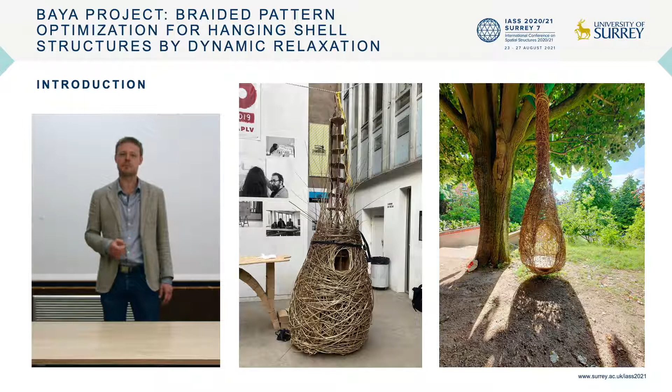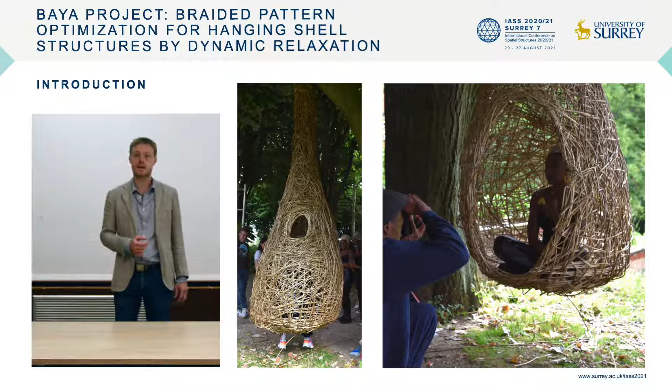Good morning, everybody. We are glad and proud to present you work of research and pedagogy on the specific typology of suspended braided structural shells. This work has been performed for a full-scale public pavilion called Baya, in collaboration with the Paris City Hall and the 19th District City Hall, by the students and teachers of the School of Architecture of Paris-La Villette and of Engineering of Centrale-Supélec of Paris.

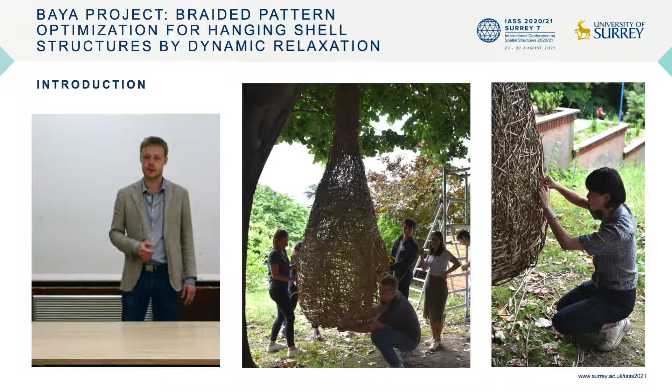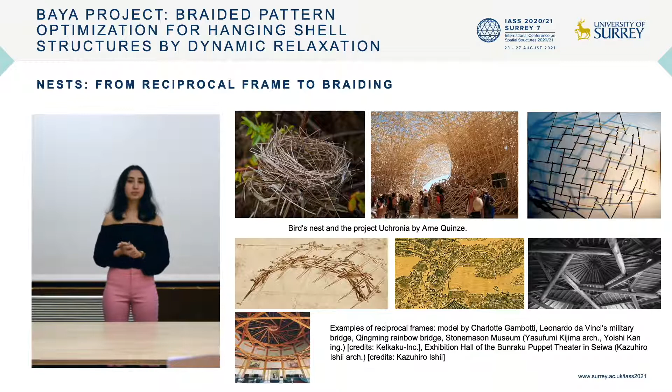When you think about how a bird's nest works, reciprocal frame is the first idea that comes to mind. The structural typology forms a surface composed of inclined beams supporting each other. The end of each beam rests on the next beam that supports it, forming a circularly closed assembly since the last beam is finally placed on the first one, each element mobilizing by bending the many other elements that intersect it.

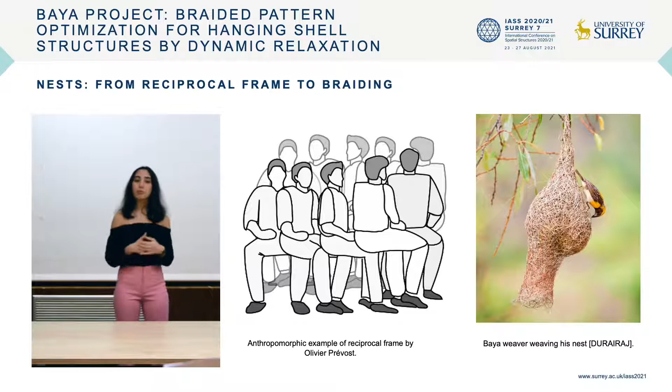However, it leads us to a new structural typology, part of this larger group of reciprocal structures: braided objects, on which the art of basketry is based. There are many different braiding techniques. The ones we have used are crocane and layered. This analysis resulted in the selection of three materials for the project: buff wicker, split wicker, and rattan blades.

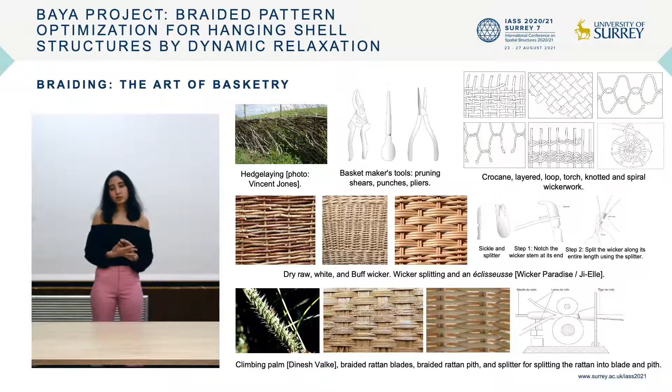Wicker is obtained from willow stems, which can reach up to 3 meters, harvested in winter. There are 4 types of wicker. Wicker is dry raw when it is dried naturally by keeping the bundles upright. After drying, the bark can be removed from the stems, and the wicker is then dried again. It will be left in water for 8 to 15 days before weaving in order to soften it.

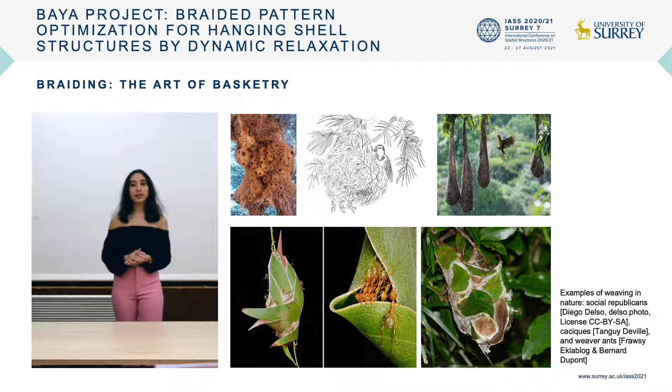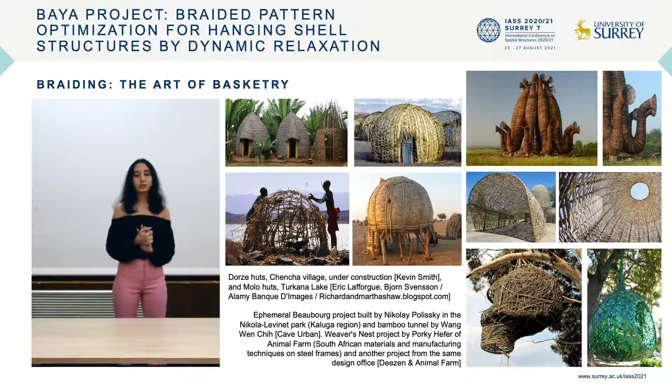It is interesting to note that basketry examples can be found in nature, as for social republicans, caciques, or even weaver ants. Basketry applications can also be found in primitive or vernacular habitat, and some examples are also to be mentioned in modern architecture. However, all of them, with few exceptions, have in common that braiding is only used as a filling element. It is not structural. Our goal is to transpose the basket maker's skill to an architectural work.

Our project, Baya, is a suspended pavilion, but our thinking is broader. It must be applicable to any loaded surface, such as shells, as well as simpler elements like beams. Our purpose is to study the constraint fields in the shell and to question the existence of an optimal braiding of the shell in relation with them.

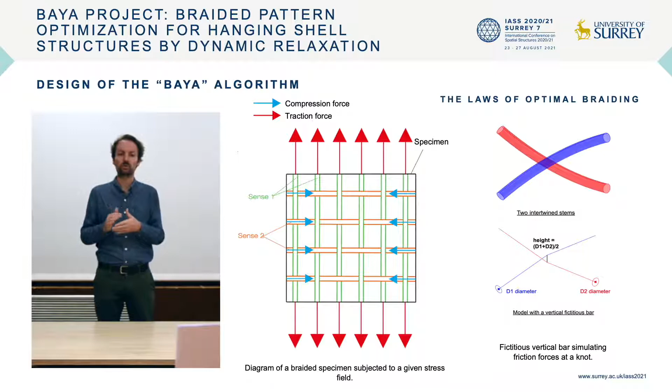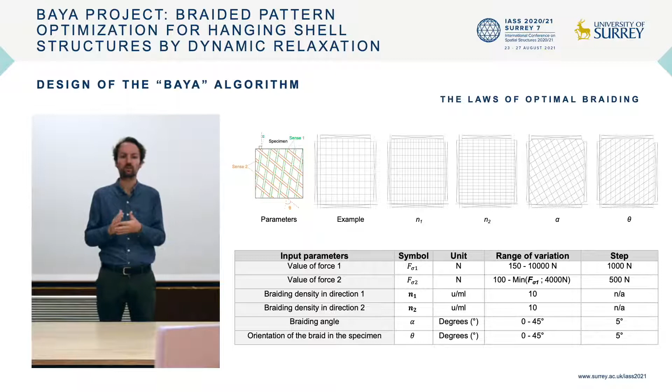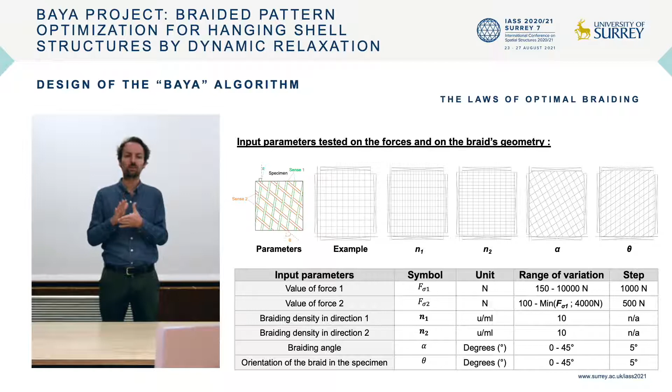Our numerical simulation is conducted by dynamic relaxation, a method that allows us to solve static equilibrium problems by fictitious dynamic calculation. The braid is a set of strands braided in 2 different directions. In each direction, the strands are parallel to each other and pass alternately above and below the strands of the other direction. The specimen is subjected to forces that simulate the principal stress field in the shell.

The study of the specimen teaches us the following principles: as expected, the yield ratio is a linear function of the tension. Local buckling is not an issue with regular densities. Global buckling depends mainly on compression. Friction forces rise with tension and fall with compression, which explains why instability failure appears with lower compression when tension is not high enough. High values of compression lead to knots, translation or rotation, even decompression.

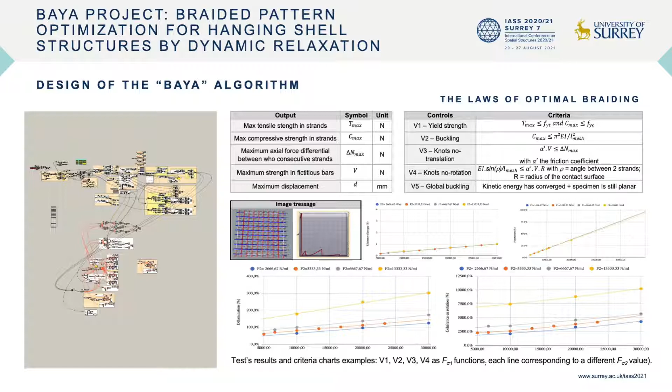Changing the braiding angle has little effect if input forces are almost parallel to the strands, with alpha close to 0, which validates the idea of braiding along the principal traces. As the results couldn't be compared with the bibliography, since we did not find any equivalent studies, it was necessary to verify them by a similar experimental study.

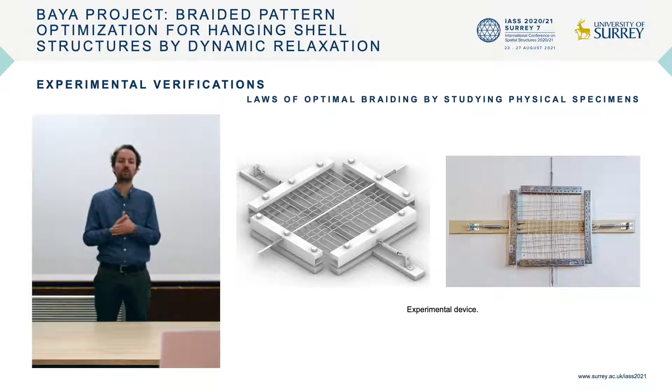The algorithm determines the principal stresses for any shell under a given load. Thanks to the optimal braiding laws, it gives the ideal braiding for the shell. The algorithm can be applied to any loaded surface, including basketry items, and we chose to illustrate its presentation on an isostatic beam on two supports loaded by a uniformly distributed force.

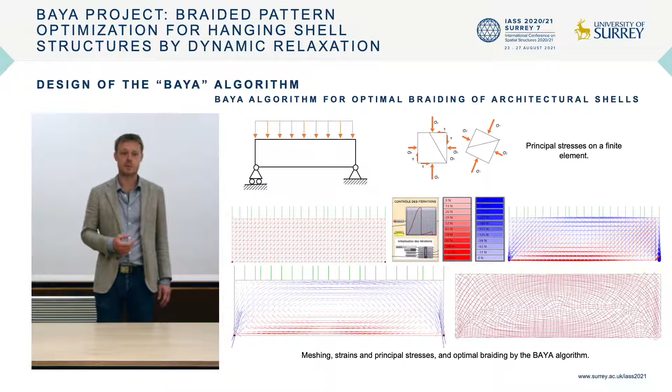The shell geometry and loading are the input. The surface is discretized into small rectangular isosceles triangles, each representing a finite element. We calculate efforts on the finite element edges by dynamic relaxation, and deduce from it the principal stresses in the finite element.

By using the laws defined previously, we eventually obtain the optimal braiding of the shell. After the study, we decided to braid the result in order to compare our Baya beam to a Pratt truss. For identical sizes, loads and safety factors, Baya needs half the quantity of Pratt.

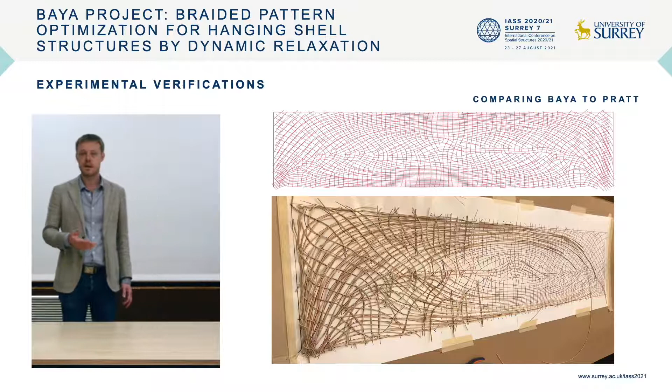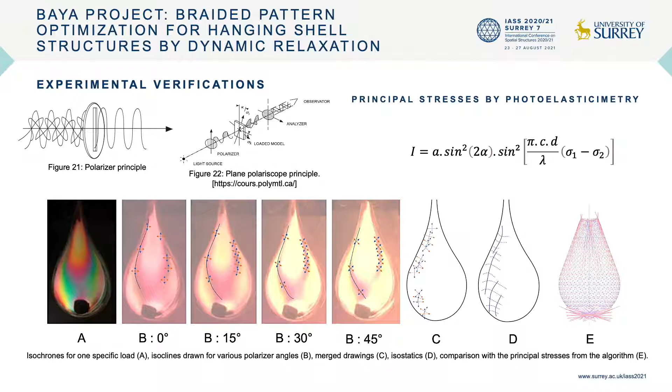We also performed an experiment called photoelasticity. We compared the principal stress fields obtained from the Baya algorithm to the isostatics of a shell made out of a birefringent material.

We tested another method to check the efforts obtained in the edges of the finite element by the Baya algorithm. We filled a suspended balloon with water, because the pretension it induces gives the capacity of compression to the balloon's skin. We loaded it with a mass. A picture analysis algorithm recognizes marker points on the balloon and converts the grid deformation into strength thanks to Hooke's law. The results are very similar to the numerical prediction.

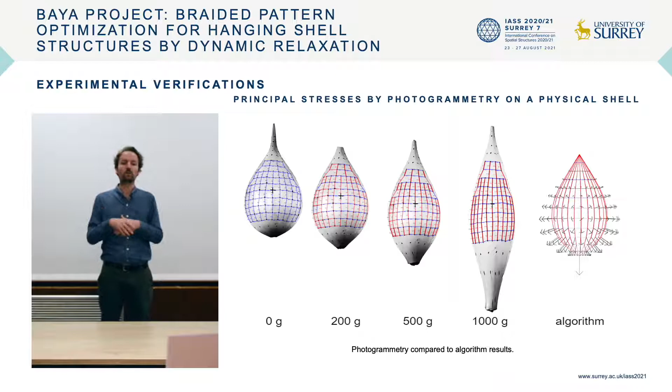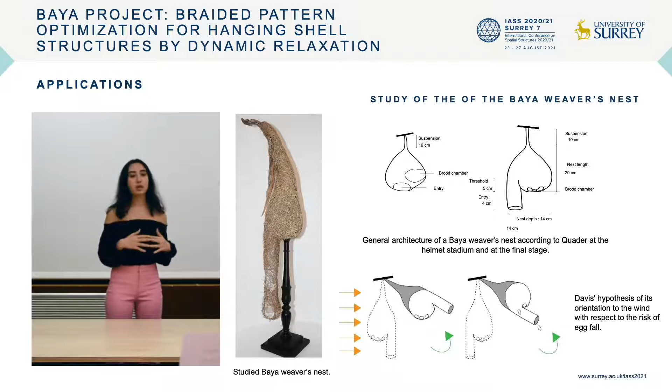The Baya project, described below, is a colony of suspended pavilions whose skin, the very structure of the object, is a braid of long and fine elements. Among them, it appeared to us that the nest of the Baya weaver was an object particularly close to our attention. The Baya weaver is a small bird which lives in Southeast Asia and builds suspended nests.

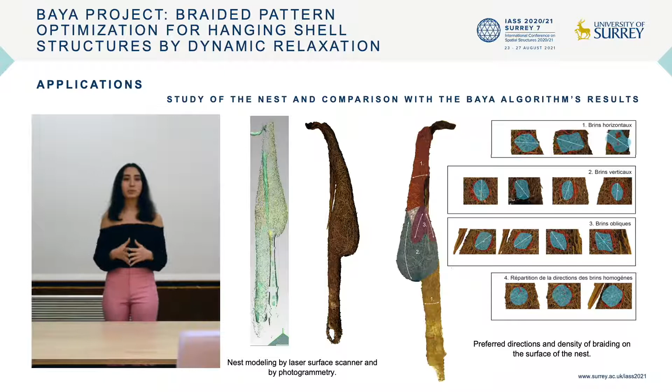The objective of this part of the study is to answer the following question: does the Baya weaver, when it makes its nests, follow the laws of optimal weaving that we have defined? To answer this, we first carried out a survey by laser surface scanner and by photogrammetry of the nest, supported by the MAP-MAC laboratory and the National Museum of Natural History.

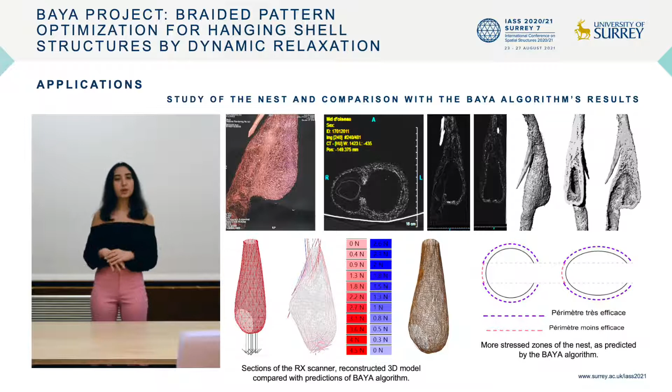The results seem to betray the ghost of the temporary scaffolding used by the Baya weaver to build its nests. To confirm this, we scanned the nest with X-rays thanks to the help of Dr. Bandeau, gaining access to the interior of the nest walls.

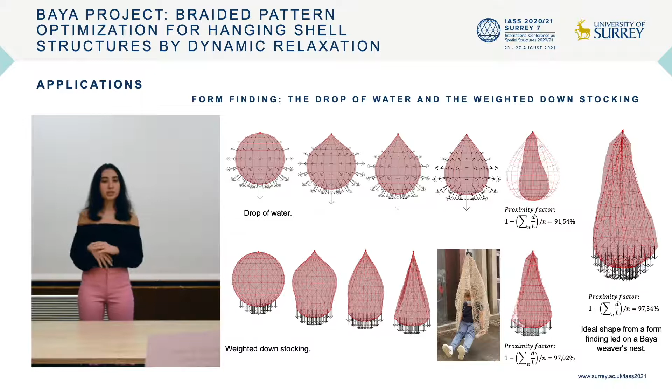Several authors compare the Baya weaver's nest to the shape of a drop of water at the time of its detachment. Others, like Newton, prefer the comparison with a suspended and weighted-down stocking. Thus, we carried out a comparative form-finding study, looking for the shape minimizing the energy involved in the two systems using the Baya algorithm. The proximity of both shapes to the nest rules in favor of Newton.

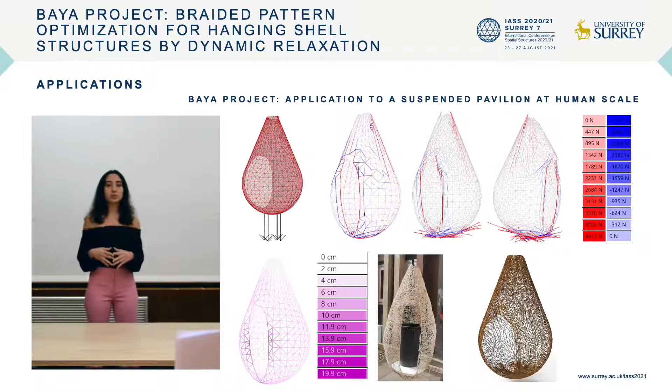Before braiding the final pavilion, we decided to build a half-scale prototype. The deformation of the prototype was critical, but fitted the algorithm's prediction. The observation of the loaded surface guided us to reinforce the density of the compressed area in order to avoid surface buckling. The park of the Butte du Chapeau Rouge is in the 19th district of Paris.

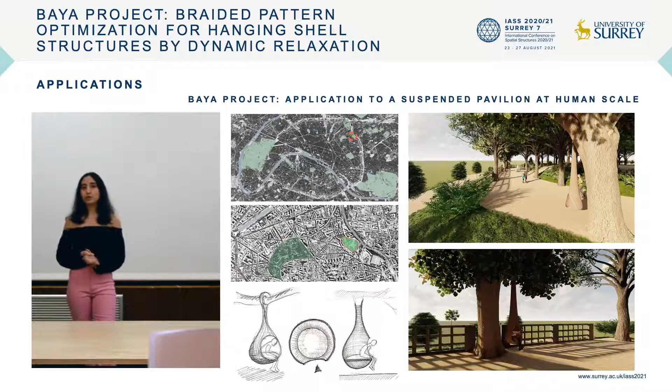After various tests comparing numerical and model studies, we opted, following the example of the Baya weavers, for the realization of several pavilions. We would like to conclude this presentation by thanking all the students who have taken part in, and all our partners who have contributed to the success of this work.